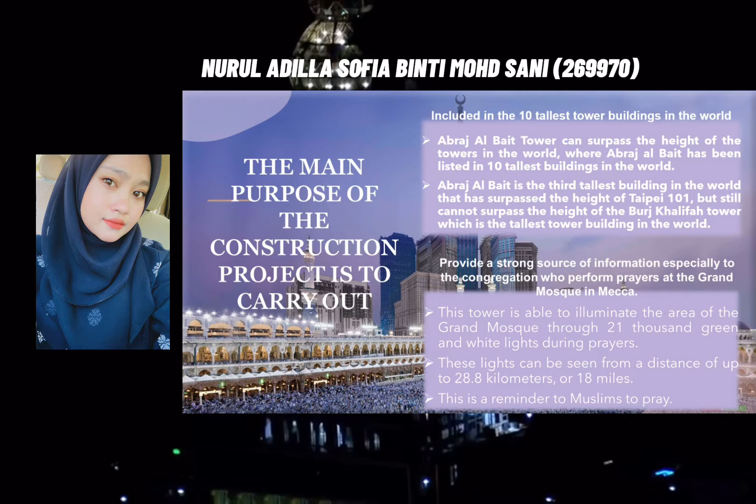Secondly, it is to provide a strong source of information, especially to the congregation who perform prayer at the Grand Mosque in Mecca. This tower is able to illuminate the area of the Grand Mosque through 21,000 green and white lights during prayers. This light can be seen from a distance of up to 28.8 kilometers or 18 miles. This is a reminder to Muslims to pray.

Furthermore, the Mecca Clock Tower was built with the aim of making Mecca the center of world time. Mecca is more appropriately described as the axis of the earth, where it is the main meridian and the optimal magnetic alignment point. Mecca is a magnetic natural zone, where the Egyptian National Research has claimed that Mecca has no magnetic force. As a result, those who live or visit there will be healthier because they will not be affected by the Earth's magnetic field.

Last but not least is to modernize Makkah. The Saudi Arabian government aims to modernize Makkah to accommodate 10 million pilgrims each year, compared to only 3 million pilgrims who could enter Makkah before. The facility can accommodate 65,000 pilgrims during the Hajj season. Visitors who want to see the clock's balcony will be given access to an elevator. An astronomical observatory and an Islamic museum are also available.

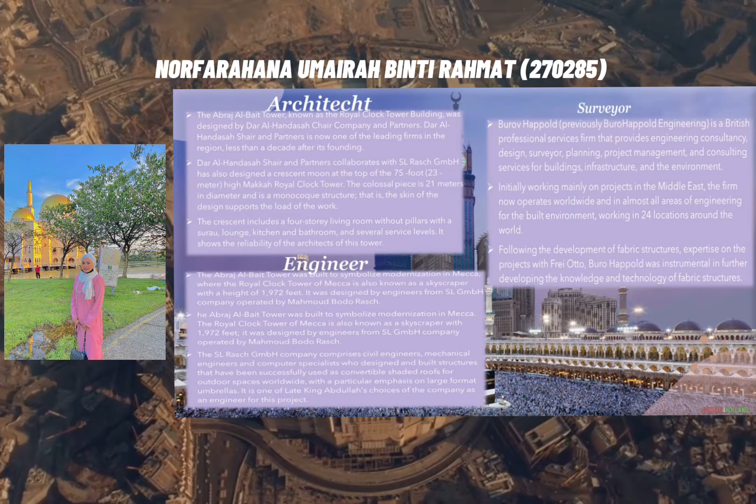The Abraj Al Bait Tower, known as the Royal Clock Tower building, was designed by Dar Al Handasah Chair Company and Partners, now one of the leading firms in the region less than a decade after its founding. Dar Al Handasah Chair and Partners collaborated with SL Rasch, who also designed a crescent moon at the top, at a height of 75 feet. The crescent includes a 4-story living room without pillars, with a surau, lounge, kitchen, bathroom and several service levels. It shows the reliability of the architect of the tower.

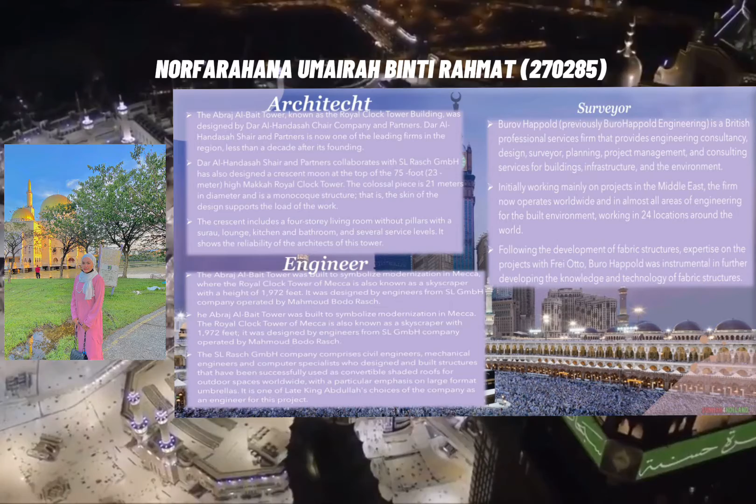The next part is engineer. The Abraj Al Bait Tower was built to symbolize modernization in Mekkah, where the Royal Clock Tower is also known as a skyscraper with a height of 1,972 feet. It was designed by engineers from SL Rasch Company, operated by Mahmoud Bodo Rasch. The SL Rasch Company comprised civil engineers, mechanical engineers and computer specialists who designed a built structure that has been successfully used as a convertible shade roof for outdoor spaces worldwide.

The last part is surveyor. Buro Happold is a British professional services firm that provides engineering consultancy, design, surveying, planning, project management and consulting services for building infrastructure and the environment. Initially working mainly on projects in the Middle East, the firm now operates worldwide in almost all areas of engineering for the built environment, working in 24 locations around the world.

Abraj Al Bait Tower's location is special, reaching just 50 meters away from Islam's holy site, Kaabah. It is surrounded by the Masjid Al-Haram, the largest mosque in the world. The 601-meter height structure of the Abraj Al Bait Clock Tower makes it a unique building, the third tallest in the world after the Burj Khalifa and the Shanghai Tower. Mekkah Clock Tower is the city's new landmark due to its unique location and substantial height.

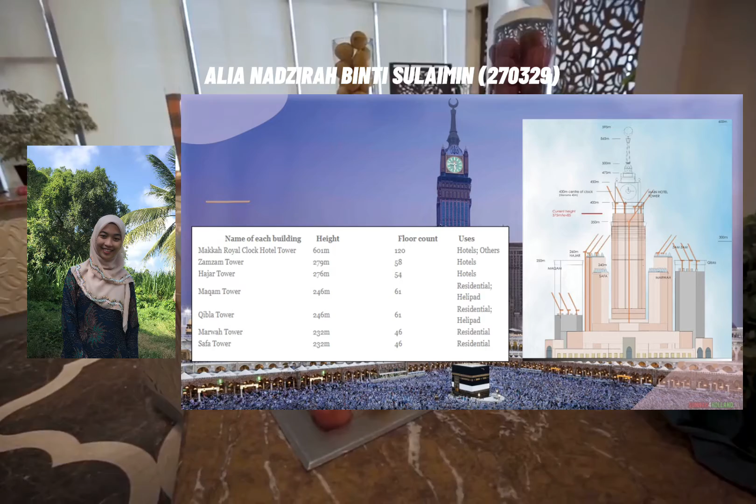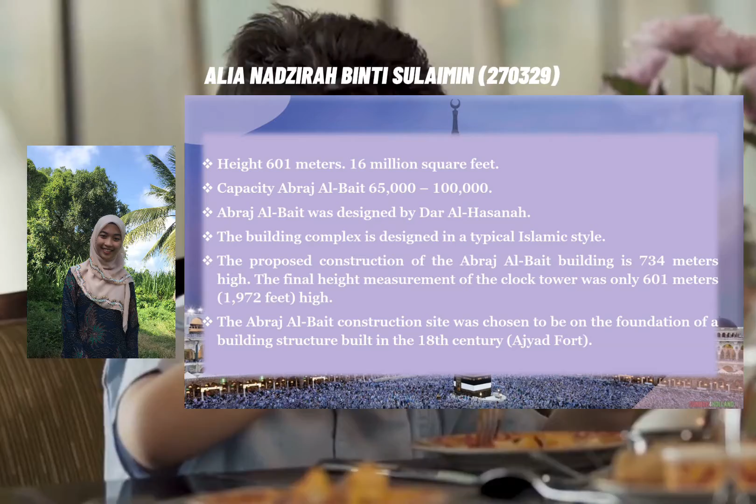The building complex in front of the Masjid Al-Haram in Mekkah consists of 7 buildings named Hajar, Zamzam, Maqam, Qibla, Marwah, Safa and also Abraj Al Bait. The Abraj Al Bait complex has approximately 16 million square feet of floor space, with a capacity of 65,000 to 100,000 people.

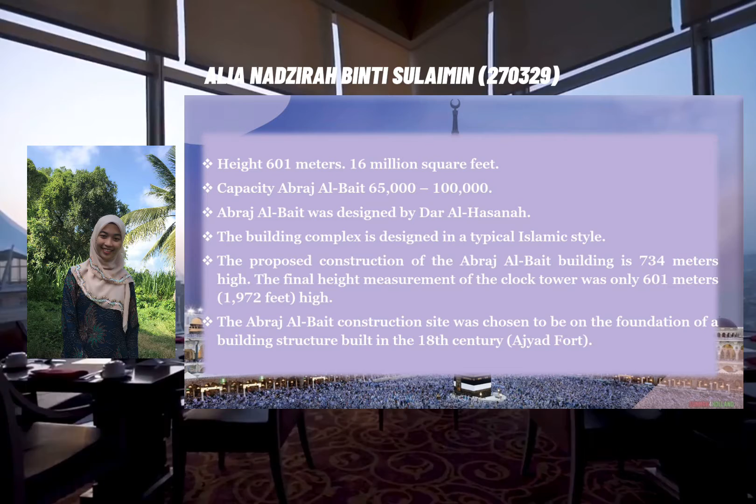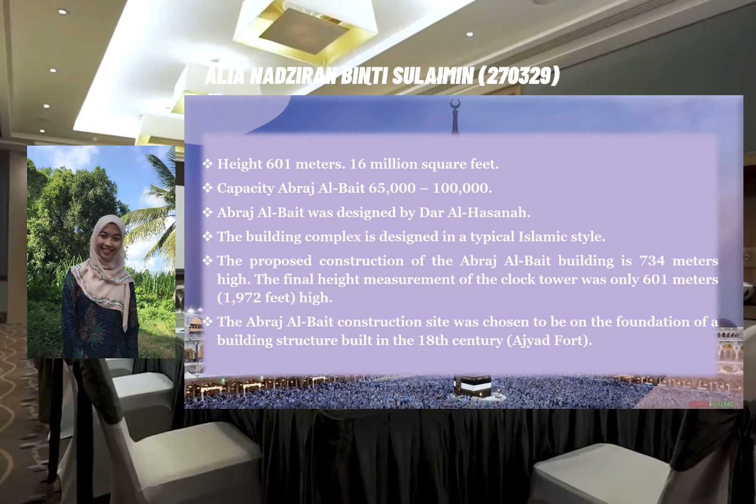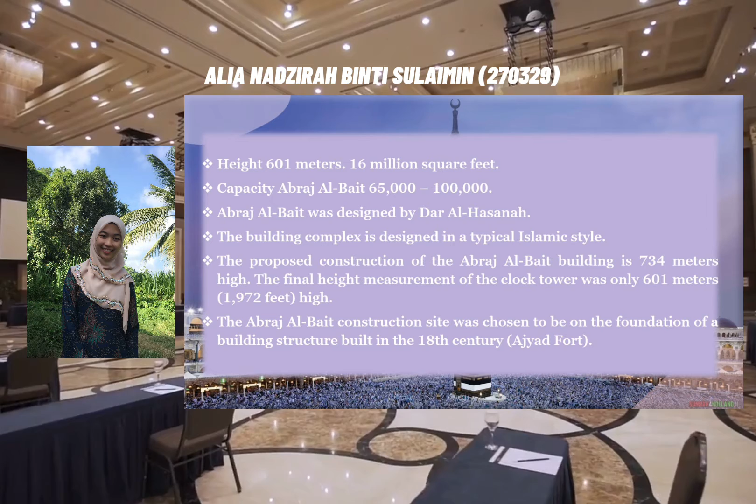Abraj Al Bait was designed by Dar Al Handasah, an architectural firm from Lebanon. The building complex is designed in a typical Islamic style. Based on the initial construction proposal, the proposed height was 734 meters. However, after re-inspection in the planning and implementation phase, the final measurement of the clock tower was only 601 meters, reduced by 133 meters from the initial proposal.

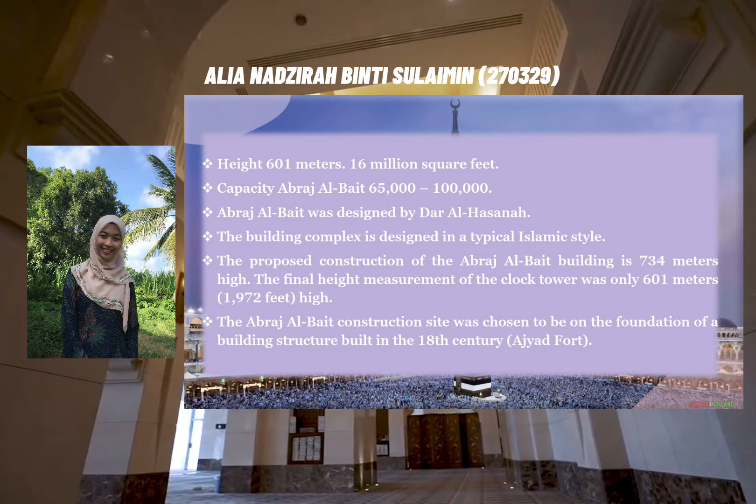In this early phase of construction, the Abraj Al-Bait construction site was chosen to be on the foundation of a building structure built in the 18th century. This location is known as Ajyad Fort, which was constructed during the time of the Ottoman Empire.

Abraj Al-Bait is a unique construction because it applies a mixed construction system. This system refers to a construction structure that combines hotels, shopping malls, residences, Islamic museums, and a large number of religious space areas.

Another uniqueness of Abraj Al-Bait is that it was specially planned by the architect using 2 million LED lights. With these lights, the tower can display 21,000 lights consisting of green and white. At night, the tower emits a green light visible from 17 kilometers away, while during the day the surface of the clock appears white and can be seen from a distance of 12 kilometers.

The last uniqueness of Abraj Al-Bait is that the clock tower building has 4 floors that can accommodate 3,000 exhibition spaces. The first floor houses an exhibition on the existing galaxies, moons, stars, and the universe. The second floor is about the existence of the sun and how the Earth and Moon travel. The third floor showcases equipment for measuring the calendar and determining prayer times. The fourth floor showcases a replica of the clock tower, a gold-plated clock hand, and a video projection of the tower's construction process.